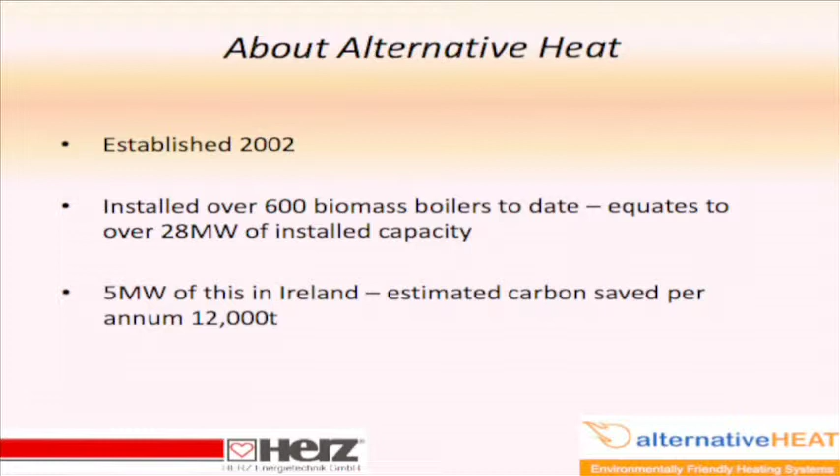Just to name a few of the example scenarios where systems have gone in, and I'll get into deeper detail as we go through as to why and where these applications became viable.

Renewable products we offer: Alternative Heat, as in the name, means any form of alternative renewable energy. We are well aware that there is more than biomass available on the ground, and we specialise in all renewable energy technologies. There is not one solution fits all, there never is, and the idea behind resourcing and working with all the technologies is that we have an open mind approach to each application, and we can look at it independently and put forward a solution which we believe best suits the needs of the client.

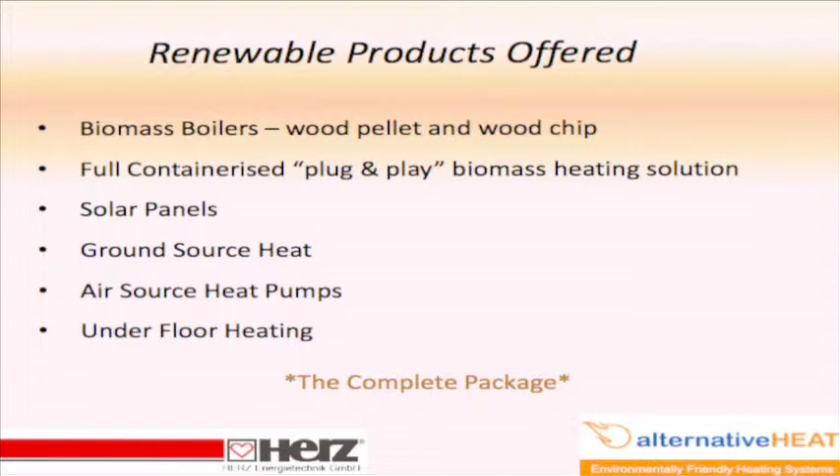I think it's an important point in the renewable industry to establish an open mind, that certainly the one mould fits all is an issue that has arisen in the renewable sector before, where certain products and certain systems have been pushed into applications that they're not best suited for, whether it be a lack of knowledge in the industry or lack of training on the products that has led it through. So it's important to keep an open mind and research the products before pushing forward what may be the wrong solution.

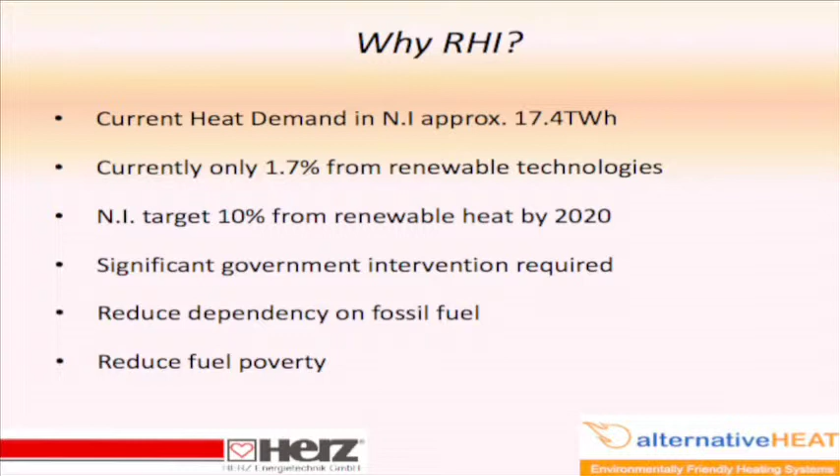In the north of Ireland, as Peter touched on earlier, we have the benefit of the Renewable Heat Incentive, and obviously what is driving that has been spoken about in depth today, so I'll skip over it fairly quick. The current heat demand in Northern Ireland is about 17.4 terawatt hours, currently about 1.7% of it from renewable technologies, with a 10% target for 2020. So there's quite a bit of work to do. It's going to take significant government intervention to reduce the dependency on fossil fuel and also help tackle fuel poverty, which is a growing problem in Northern Ireland.

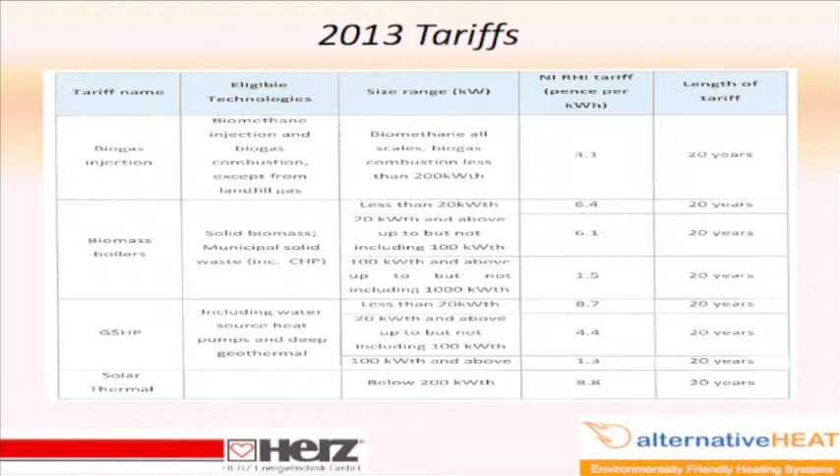The tariffs I'll skip over briefly, which are eligible for renewable technologies within Northern Ireland, but the next slide maybe better helps explain just what those tariffs mean. And every industry and every application is different as to how hard the boiler will need to work or what energy will be produced from the renewable heating system.

This table is put together to give an indication of what financially that could mean, based on a 99 kilowatt boiler operating for 2,000 full load hours in a year. Between RHI income and fuel savings could generate between 15 to 20 grand a year, depending on where the application is, whether it's offsetting gas or oil.

As that operating hours increase to typical maybe nursing home applications or hospital applications where 3,000-4,000 annual full load hours per year would be typical, these incentives rise significantly. So it's not hard to understand why and where the renewable products, the biomass boilers, fit in and why they make sense and how they should be pushed forward to help drive the renewable market.

There's a massive rate of return on the investment, and with the RHI there's a guarantee of a 20-year income, so it's a safe bet.

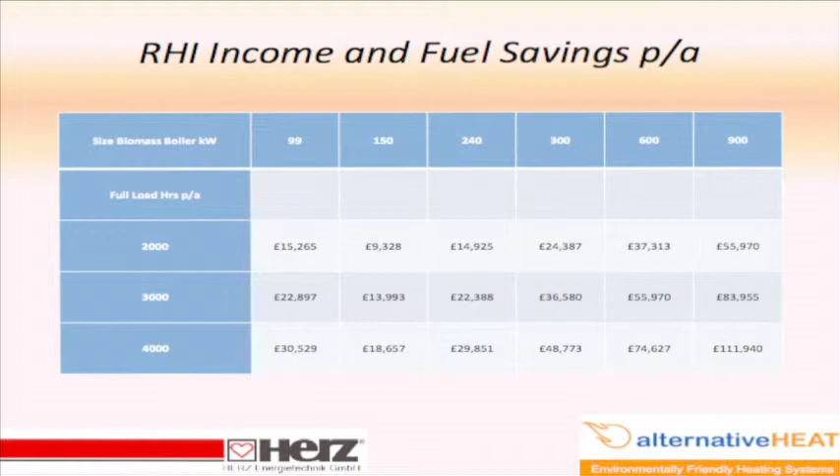As you run right up through with the different tariff levels, even though we have a lower tariff level on the larger scale biomass at 1.5 pence, still any 900 kilowatt boiler will typically be doing 3,000 to 4,000 hours a year, so significant major return on investment with 83 to 100, 110 grand a year return. To date, we've submitted over 65 RHI applications which have been successfully approved.

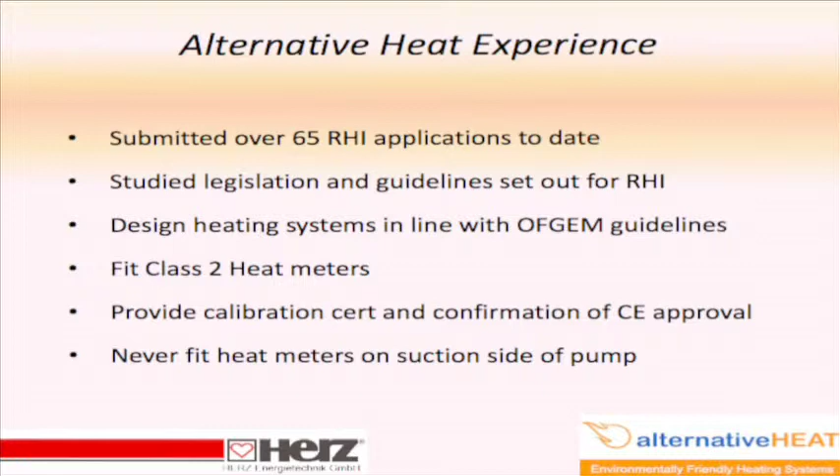We've studied the legislation and the guidelines in depth, and we designed the heating systems in line with Ofgem guidelines, which is an important factor. The last graph is very lucrative. It works very well if you are obtaining the RHI and your scheme is benefiting not only from your fuel savings but also from your renewable heat incentive. So we spent a lot of time researching what these guys are looking for and streamlining the solutions to be sure they're in context with that.

There's a range of different tick box exercises which is important throughout the design. As far as heat meters, they will pay based on energy generated and delivered at source or at site. So it's important to have the design compliant, with the heat meters fitted in the right locations and in line with our legislation. Submitting the correct information first time speeds up the process, gets it online, and leaves it much easier.

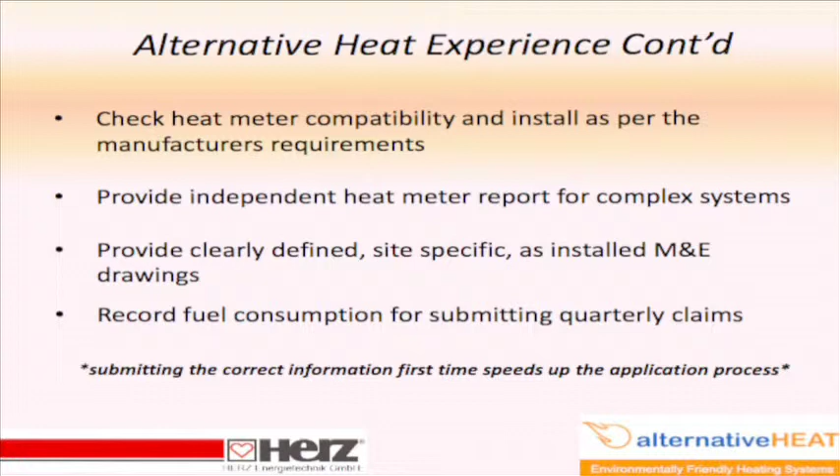Different technologies and applications. Today's primary focus is obviously on biomass boilers. Throughout Ireland and the UK, the uptake on renewables is primarily led by biomass boilers, and it's easy to see why. The application for a biomass boiler is very similar to an oil or gas system. They'll work on a high temperature or low temperature system, and they'll integrate into a new build or a retrofit system, which leaves a broad net for this solution.

When you step down to ground or air source heat pumps, just to touch on them, they're suitable mainly for new build. They're looking at low energy, low temperature loads. So for new build, high insulated, underfloor heating, they do pose a very substantial solution, but obviously this net is much smaller than above. And likewise to touch on solar thermal, again retrofit or new build, but on a different scale of output.

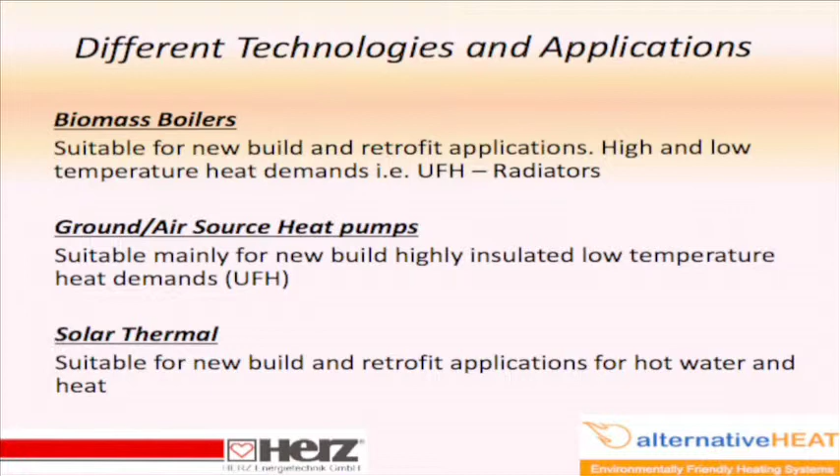About biomass boilers, briefly, they're fully automated systems. They're highly sophisticated technology. Can run on either wood chip or wood pellet, and that's a strong point that I would like to touch on.

A lot of today's talks have been based on wood chip. Wood chip is not the only source. Wood pellet is also a very viable source for biomass, and it's important to make the right call for your system at the design stage as to whether it should be operating on wood pellet or wood chip.

Simply because certainly what comes with wood chip is an uncontrolled fuel source. The moisture content will vary depending per load, per supplier, per day. The quality of that fuel is not controlled, and therefore it's important that the end user must have a manner or a means of controlling that, either via paying per kilowatt hour in an ESCO type application, which is very viable, but again you need to be of a scale to make an ESCO work, or on a smaller scale biomass, the domestic sector, or a lot of the small scale commercial, wood pellet does pose a very viable solution that should not be brushed over.

The capital outlay of the biomass plant is much cheaper because the augers, the transfer system, the fuel will fall under gravity and can be collected, whereas when you run on wood chip there's an element of control that needs to agitate it. Your delivery system isn't blown the same way as oil or wood pellets, and again on a project specific basis this is something that should be studied.

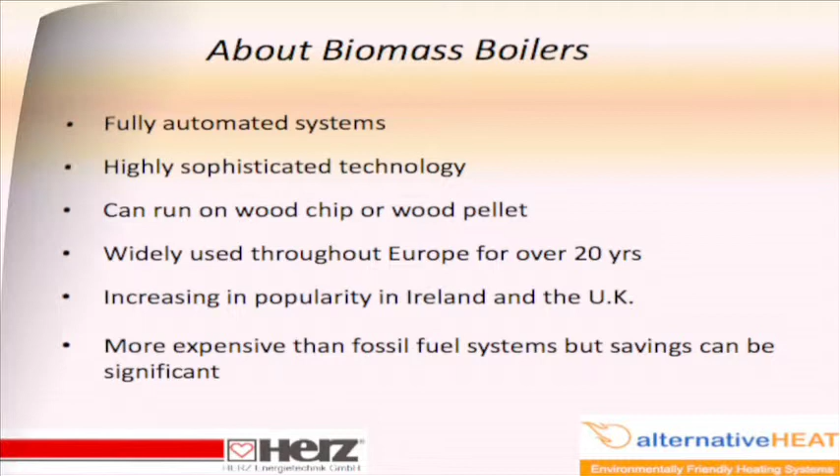Cost-effective applications boil down to quite a range, obviously: hotels, especially with swimming pools, nursing homes, leisure centres, hospitals, industrial applications, large heat users and steam users, and housing.

And I put district heat schemes here specifically, because for housing plants the district heat scheme lends itself much better to the ESCO type scenario. It is a broader outlook as far as whether it'll be suitable for pellet or chip.

If you're on a one-off house scenario, house per house, for me it's a pellet system, which certainly works today, and we've shown throughout Europe that the base price of pellet has been stable, so it should work in the near future. But if we open and develop these schemes into larger district heat schemes, we have more control again, where we can align ourselves with wood chip suppliers. We can start to self-sustain with willow and forestry in our local economy, and the operation, maintenance and rate of return should be much better.

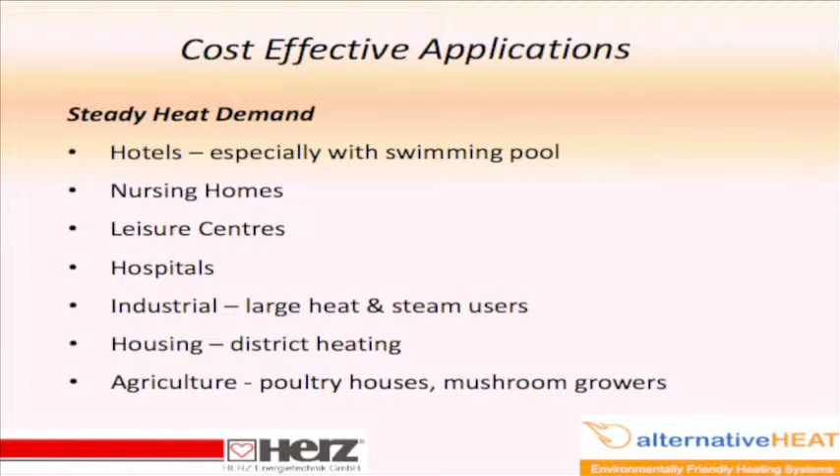The agricultural sector is a wide range, from poultry houses, mushroom growers, pig farmers - the list is endless.

Biomass boilers: the RHI that we benefit from in the north of Ireland, and it's running throughout the UK, is a very, very good incentive. It makes a lot of sense, and certainly we're lucky to have it, and I would be driving and hopeful that a similar scheme will develop and come forward in the south. One thing that is important with it is it's an investment with a 20-year return if your product and your technology can operate for 20 years.

So it's important to dig into your investment, to dig into your supplier, to be sure that the product or the technology that you're looking at is established, has shown and can deliver heat and operate and run for the 20-year period. Otherwise, what it does pose is a false economy. And we've seen that before in the north of Ireland many times through previous grant processes that came prior to the RHI, where you got £3,000–4,000 for putting in a biomass boiler. You bought the cheapest biomass boiler on the market, and it was looked at as a no or low risk type approach, which was crazy.

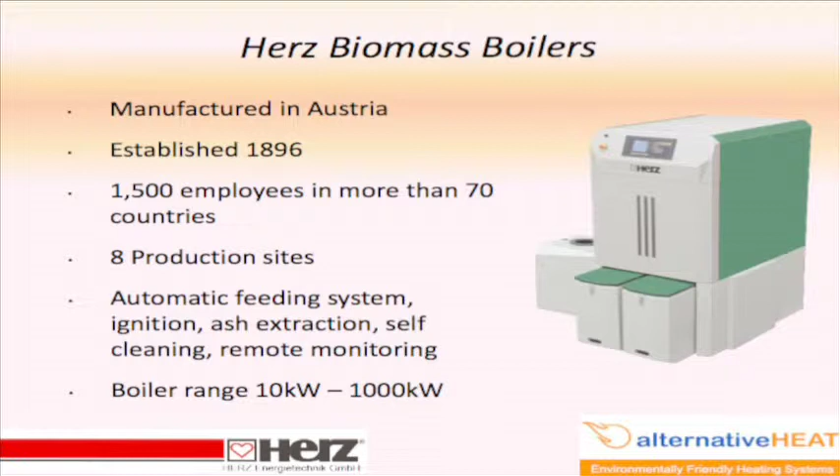What we believe the RHI brings to it is more stability. It makes more sense, a brilliant rate of return on investment, so invest wisely. And we work with the Herz biomass boilers for that reason. They're long established, over 1,500 employees in more than 70 countries and 8 production sites. The boilers are fully automatic, with the vertical heat exchanger to allow them to deal efficiently and effectively with the ash content that naturally comes with burning solid wood fuel. We do a full range from 10 kilowatt to 1 megawatt.

Best practice comes into play in all cases, but primarily in the biomass, it's very important to size the biomass boiler to satisfy on a commercial scale the base load demand. Or with a two-pronged approach, you need to look carefully at how you cover the full peak load demand of the building if you're doing a standalone biomass system. The difference in a biomass boiler or a gas system is the ignition and operation. Once the boiler is running, it'll produce heat and energy in the same format or same means as an oil or gas boiler. The initial starting process is the difference.

They're much slower to ignite. The process of ignition: they bring in the fuel, they power the heat gun, they ignite. They want to run at that scale when they have ignited. Whereas with a gas boiler, if it fires now and it stops in 2 minutes, it has no real net effect. Certainly the efficiency of the system is lower, but it's more detrimental to a biomass system. So ideally, in best practice, the biomass boiler is sized to work on base load demand, whether it be 65 to 70% of the building's annual heat load, and in those means we are sure that when the boiler starts it works for a period of minimum 1 hour, 1.5 hours, so we're sure that the annual efficiency of the system is considerable.

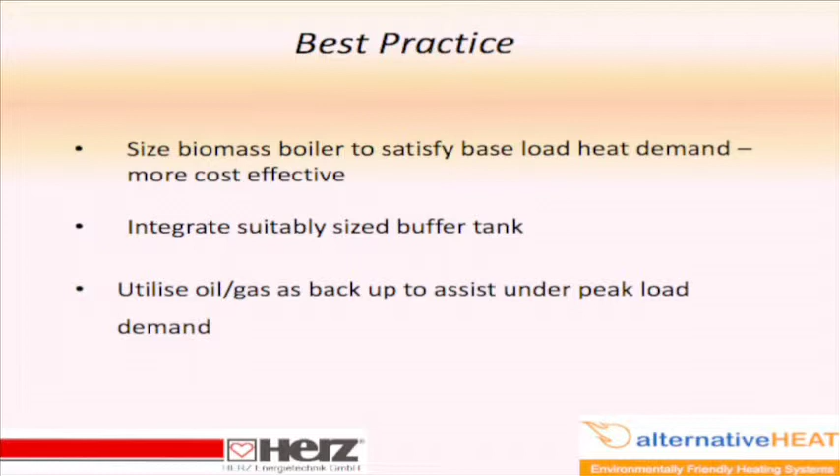You need to integrate a suitably sized buffer tank, again depending on what you're looking to achieve, primarily to control the start-stop of the boiler. And there's various different ways that we use this buffer tank; we have a slide further down to elaborate further on it, but we can use the size of the buffer to maximise the output of the biomass boiler as well as control the start-stops. On most commercial applications, they'll have backup, so an oil or gas boiler would be recommended in most best practice to act as the backup or to assist if required on the peak load demand.

One obstacle that we came across many times 5-6 years ago was the size. The physical plant, the size of a biomass boiler, could be 2-3 times larger than a conventional oil or gas boiler, maybe more in some cases. Not to mention the fuel. On an oil system, yes, you're used to storing fuel, but wood chip can require 3-4 times the space of a conventional oil system because of its bulk density. Pellet is 2 to 3 times smaller than wood chip.

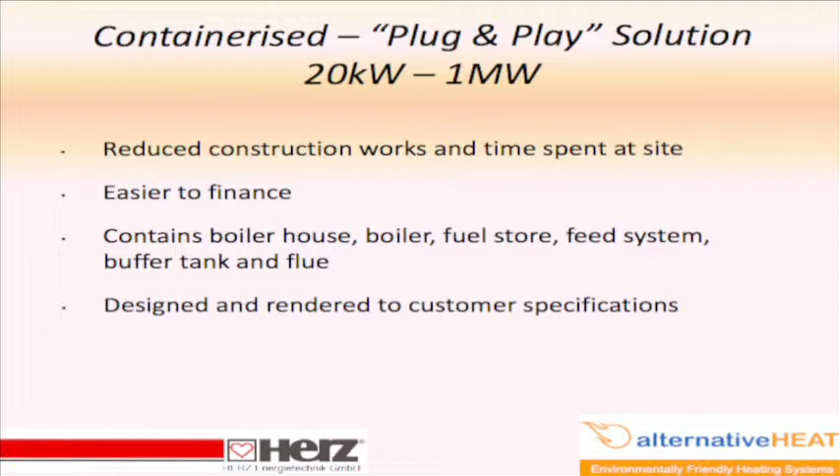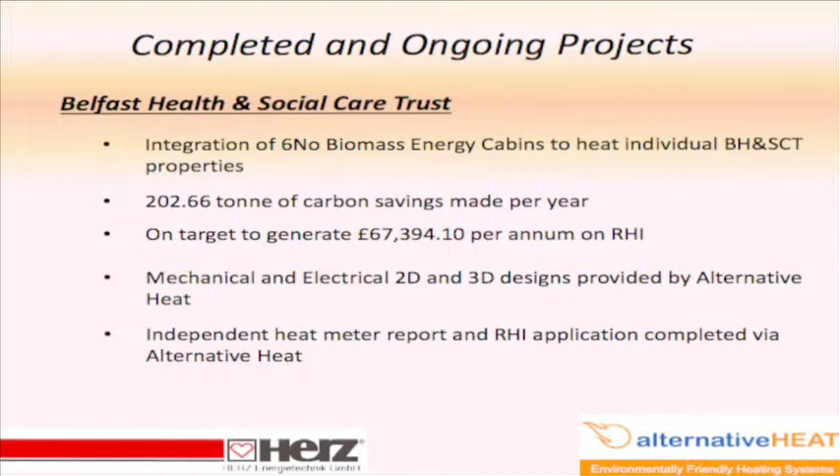Just to give an outline of completed and ongoing projects, the sectors that we've worked in, how the systems have been integrated and what they are doing. So on this first example, we've installed 6 biomass energy cabins for retrofit applications for the Belfast Health and Social Care Trust. We're offsetting 202 tonnes of carbon per year, on a target to generate £67,000 per year on RHI, and the full design and independent heat meter report and RHI was processed through Alternative Heat. But again, on this study, there was a feasibility study carried out before any contract was looked at or before any agreement was made as to whether it would work.

For the Belfast Health and Social Care Trust, we looked at 14 sites, of which 6 were suitable, and the remainder certainly could be worked, but they weren't deemed best practice or ideal solutions, I should say. But on this type of application, when the research is done beforehand, this information is clear. So the feasibility study lets the client get a better understanding of what the project is going to deliver, and then we can be held responsible at the end of it for making sure it does deliver that.

Again, a fully containerised plug and play unit. Space was an issue, they hadn't space on site, this was the solution. Lochaber Leisure Centre was a system that we did for the Highland Council.

When we studied the heat load profile for the Lochaber Leisure Centre, it was similar to many other leisure centres we looked at. The peak load demand in the morning for 1.5 to 2 hours was 750 kilowatt, because the through flow of the early morning people in for showers, for use on hot water, was at a peak, and it balanced out through the course of the day to average somewhere around 350 to 400 kilowatt throughout the rest of the day.

So what we did in this application was we integrated a 400 kilowatt biomass boiler with a 15,000 litre buffer tank, which helped the biomass boiler cover the peak load with the stored energy that it worked to produce through the night in the 15,000 litre buffer tank, and in turn generated a very good rate of return.

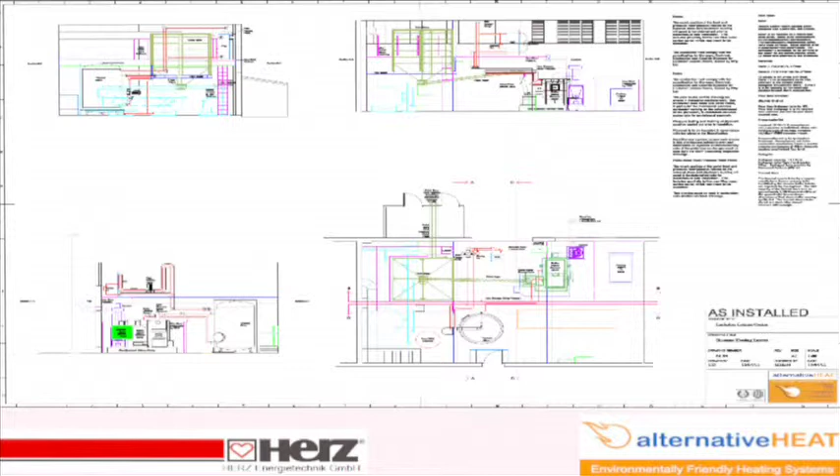The idea is to get the qualified companies in at the early stage, show them what you're doing, give them a picture of what you're trying to achieve, and take the information back that they have on board to help vet and run feasibility studies before jumping in.

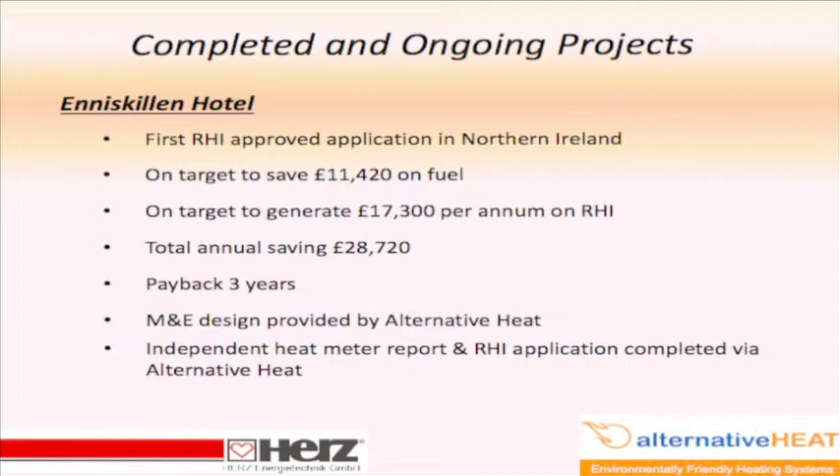Enniskillen Hotel was one of the first, if not the first, RHI approved application in Northern Ireland. Again, it was a containerised unit. It was an oil-fired central heating system that we offset, so they're generating 11.5 grand a year on fuel savings, on target to generate £17,000 per year in RHI, and they're in line for a fully fitted out containerised unit, a payback of circa 3 years. Again, the full design, layout, drawings and RHI was produced and run through by ourselves.

Another example which is interesting, the agriculture sector, which we touched on, certainly in Northern Ireland poses an interesting sector for renewables and biomass. This particular site was a site that we started on maybe a year and a half ago, and initially we integrated 2 number 99 kilowatt biomass boilers to replace the direct fired gas brooders which were heating the poultry houses.

There were a number of benefits to this scheme, in that the direct fired brooders in the houses absorb an element of oxygen which depletes the oxygen level within the house and creates a less comfortable space for the bird to grow. And through our research and development on this site, the biomass posed a benefit to fuel saving, also RHI advantage, but also a healthier crop, and the client is benefiting from a higher rate of return from his yield of birds.

This site inadvertently has run on to 14 poultry houses on site. The first 2 were the test site, and we're set next month to complete the 14th house. So it proves that the system does work very well, and the rate of return is out there.

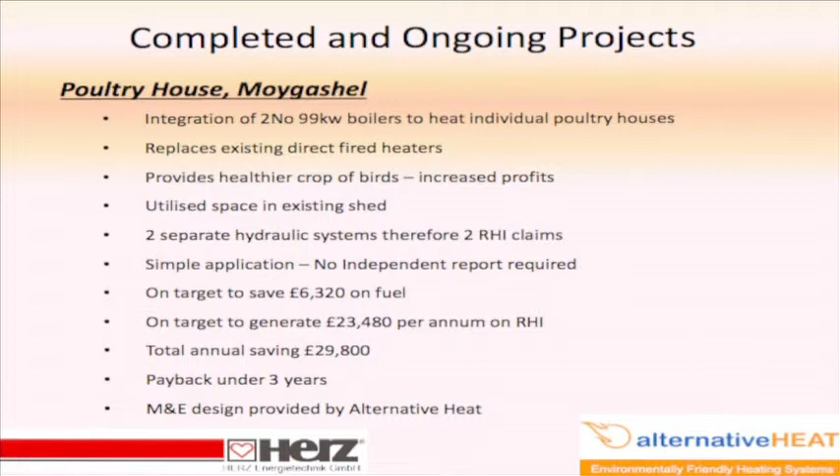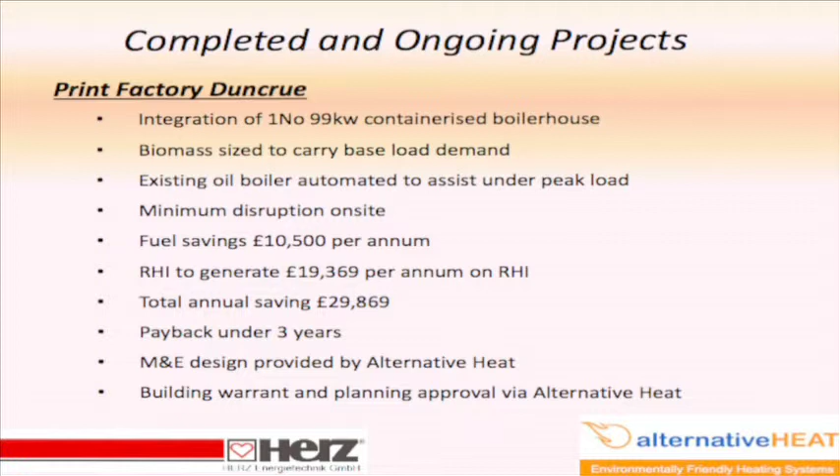Simple print factory setup in Duncrue. Again, 99 kilowatt, availing of the best tariff, 6.1 pence a kilowatt hour. Fully fitted out containerised units, offsetting oil, believe it or not, in Duncrue, which again left a great rate of return, and in turn payback of 3 years.

One major step which we've brushed over, and it has been talked of, is the upfront costs, and we're not blind to the fact that these systems are expensive. We're also not blind to the fact that there is an element of quality needed in it, so there needs to be a cost for the system if you're going to make sure it's going to run for 20 years. There is help certainly in Northern Ireland for that, as far as to avail of the RHI, you're not allowed to accept grant funding, or if you do, you must repay it to leave yourself eligible to claim the RHI.

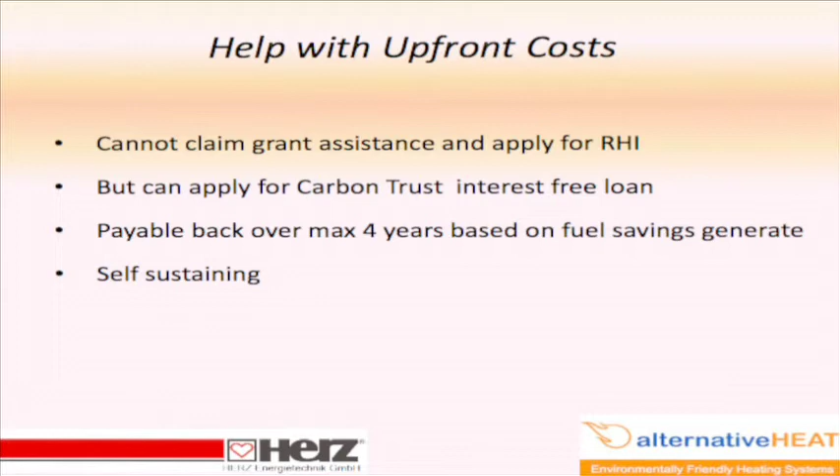But for certain industries, setting aside the agriculture sector, which is not acceptable for loans under the Carbon Trust, quite a number of the slides that I've shown previously availed of an interest-free loan through the Carbon Trust, which helped for their initial outlay on capital costs. The interest-free loans pay back over 4 years, so self-sustaining. With the fuel savings and the RHI accrued, the loan was interest-free, self-sustaining, and in 3-4 years the client was in a win-win scenario. That's basically all I had to say, and thank you for listening.